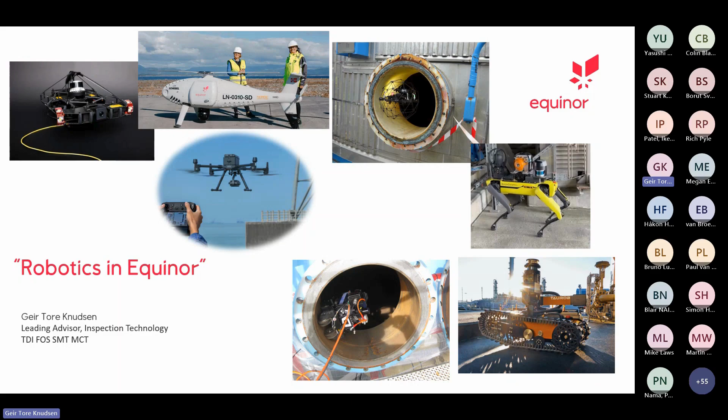Today, I will try to give you some insight on where we use robotic technology in our value chain, and maybe also touch into requirements and a little bit on technology development as well. But please note that the examples I'm showing on the slides do not represent all technologies we've been looking into, just some of them, to give you a picture.

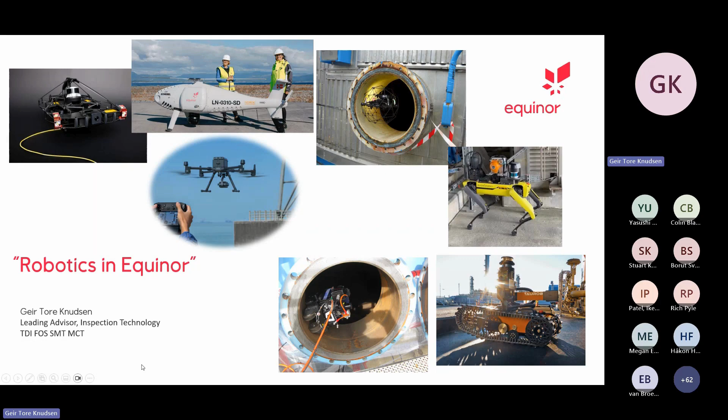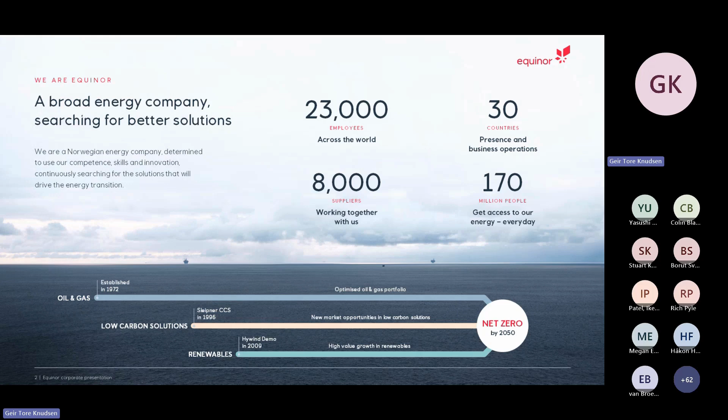First, a couple of slides to show you who we are as a company and what business we're in. We are a broad energy company, as many of you know, over 23,000 employees across the world, present in over 30 countries and over 8,000 suppliers we use. And I guess many of the suppliers are present here today.

A bit on our strategies, which is always safe, high value, and low carbon. So now let's see how robotic technology fits into those values and strategies.

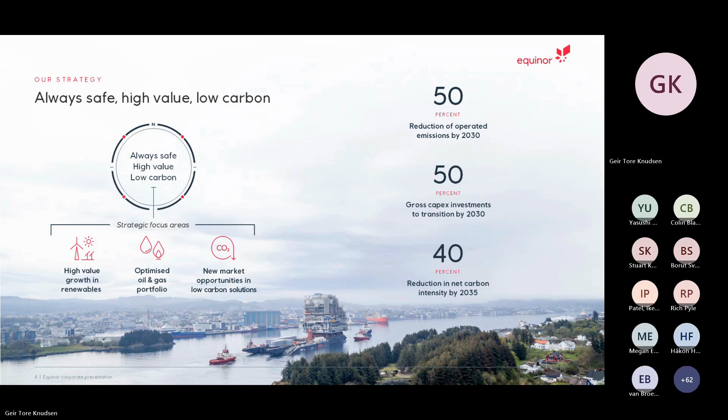Why do we use robotic and drone technology in Equinor? For the strategy always safe, this is all about minimizing the HSE risk by using robotic technology when we perform operations subsea, topside, in confined spaces and at heights, because we don't want human beings to be in those areas if they don't need to. If a robotic solution can do it, we want to use it.

And regards to high value, of course it gives us reduced cost if we plan it correctly, by excluding time-consuming and expensive support activities like scaffolding, blindings, and planning. And for me, working with inspection, the quality of the data is increasing by using robotics that can carry new sensors that give us more accurate data.

This sentence, I used to call it the Kinder Egg sentence, because it gives me a lot of things, like the Kinder Egg gives me. So it sums up the bullet points quite nicely.

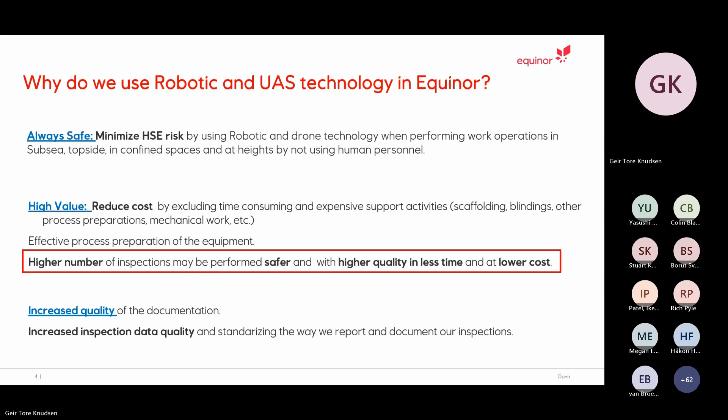We also follow the nine life-saving rules that many others do, and the confined space and working at heights rule fits right in with robotic and drone technology with regards to having a positive HSE impact.

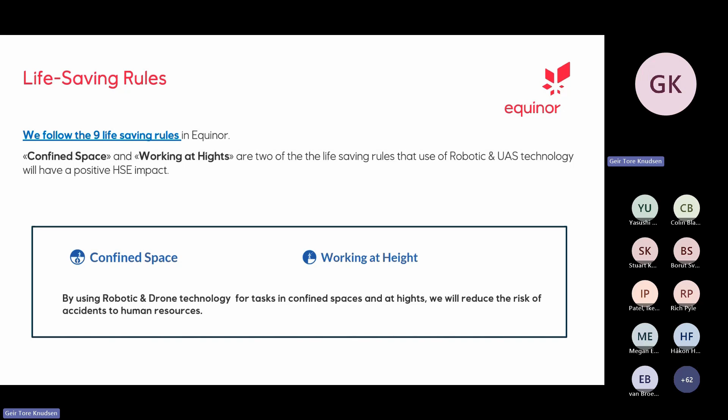When it comes to requirements, we now have requirements for working environment and inspection that involve use of robotics or automated systems, like it says here. It says that remotely controlled and automated systems shall be the preferred solution in the working environment requirements.

We say the same wording in inspection, but with inspection requirements we also say that we should use this technology if the data quality is equal or superior compared to traditional inspection solutions, because it's all about the data.

So if you compare it to how we did it before, we did it the old way because that's what we knew, we were happy with that, and sometimes a clever guy, forward-leaning on new technology, comes with a robotic solution or drone and says let's try this, and we do it. But now we try to flip it around, getting it into our processes, saying that we should first look at using automated systems, and then if that can't do the work, you can go do the traditional way.

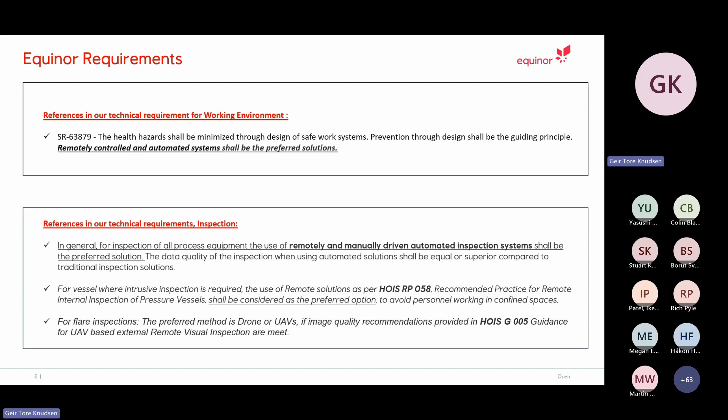Like you see on this slide, the RP58, the recommended practice for internal inspection of pressure vessels, and also the G005, use of drones for external visual inspection. So really good documents that we can refer to in our requirements.

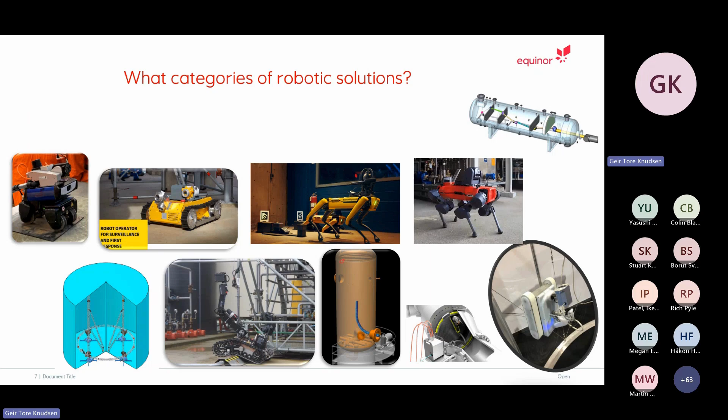What categories of robotic solutions do we have? I will quickly go through the areas where we use robotic technology, not the technology itself, but where we use it, starting from the deep subsea and all the way to the sky. Again, please note that this is not all the solutions we have been looking into, so the important thing is where we use it.

Okay, we're starting at the deep subsea. We have used ROVs for many years in the company and built up good experience in this field, and we have our own subsea division for these kinds of operations.

We use a lot of operators, contractors to do this for us, and we are increasing the use of ROVs. The goal is to reduce vessel operations offshore to a minimum by increasing the use of so-called residency ROVs that can live subsea for a longer period of time, like this example shows. So this is an important area for us.

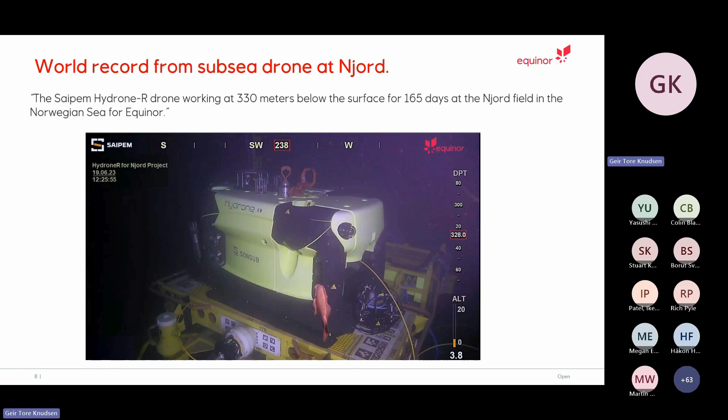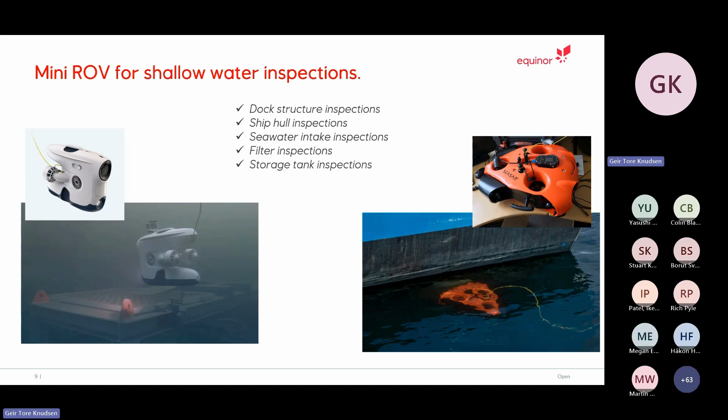Moving up from the deep subsea into shallow waters, we use mini ROVs for different kinds of inspections, like inspections of the seawater intake for land facilities, filter inspections, water tanks, ship hulls, and so on, like you see in the picture. So that's also an off-the-shelf, easy way to do inspections.

Still in the water, but moving up from the shallow waters to the splash zone, risers and other structure offshore. We use different kinds of solutions to perform inspection and maintenance operations in the splash zone area. This is being used more and more. Some of the solutions you can see here.

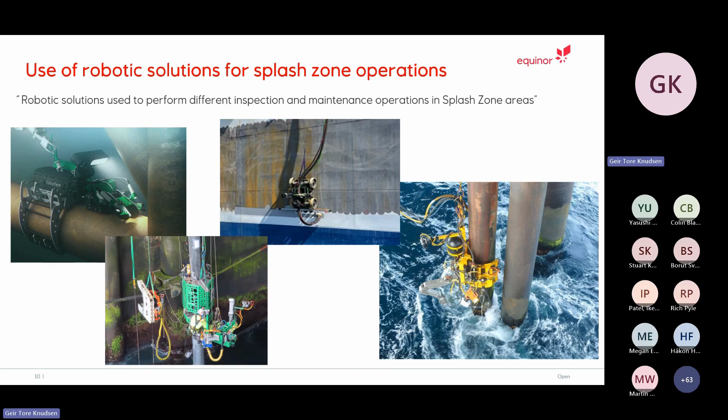Now let's move up from the water, topside, offshore and onshore assets. Here you see some belt-driven and leg robots, operator robots we can call them, that can also do inspection tasks for us. You see the list of tasks we are looking into, but not limited to that.

You have all heard about the 4Ds when robotics come into play here: dirty, dull, distant, and dangerous. And of course, these kinds of solutions can help us with many of those Ds, if you can call it that.

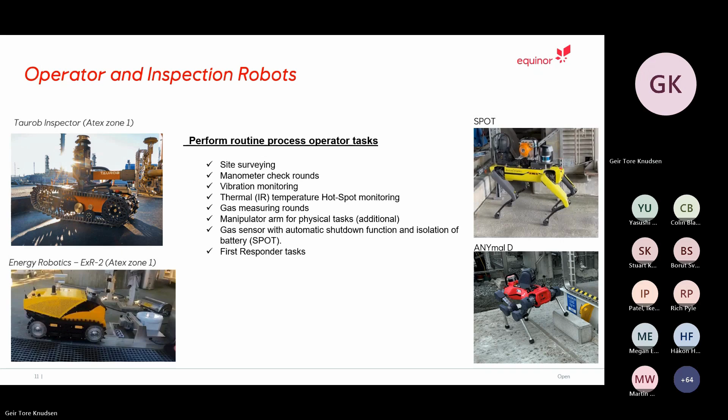We're also using robots for welding. Maybe some of you have heard about Weldar, an idea that came from one of our onshore plants in Norway, Tjeldbergodden. The concept is to perform weld repairs of corrosion damages on process equipment on site with the equipment still in service. So of course, that's a big value for us.

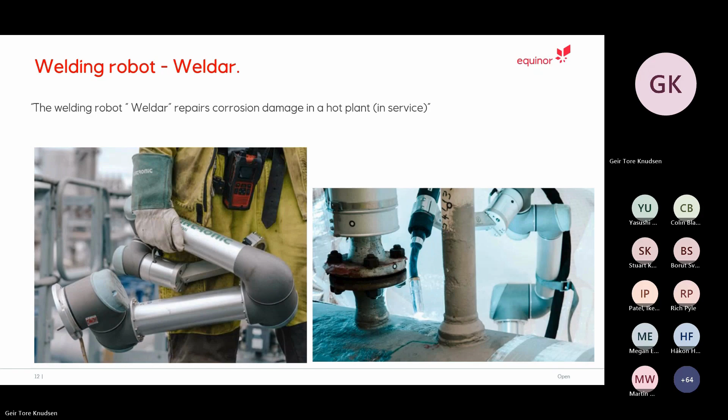And also, if we go into confined space, we have this solution, the Markus robot solution. It is a modular concept that you can tailor build to what you want, really. Initially it was designed for painting and sandblasting, but is now growing to be a solution for also other tools and operations, like you see on the picture to the left.

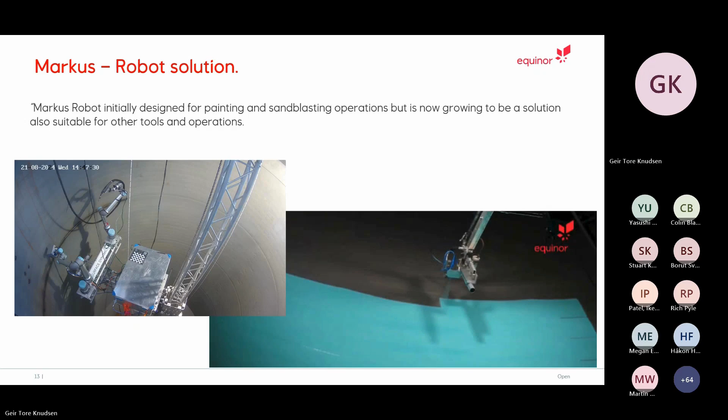Where we have welding, in fact it's a Weldar robot also mounted on the Markus robot. So here we are still in the confined space.

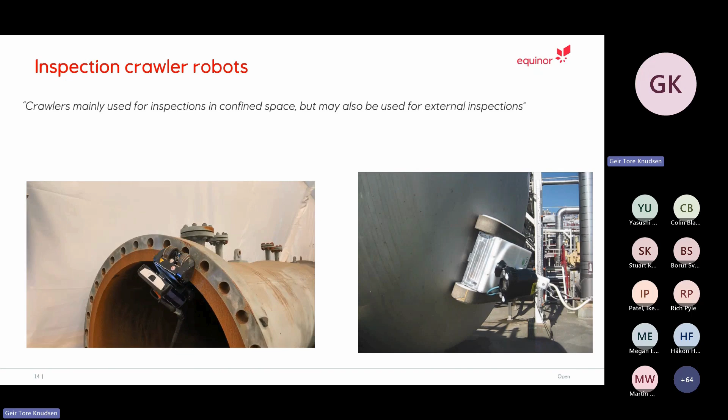And the crawler to the left, you can see, has magnetic wheels. I guess you have seen both of these solutions before. But of course, you can see that they get around and get the job done if you want to do visual inspection and some wall thickness measurements. So we use these types of robots when we can, in all kinds of equipment, if it's safe enough, of course.

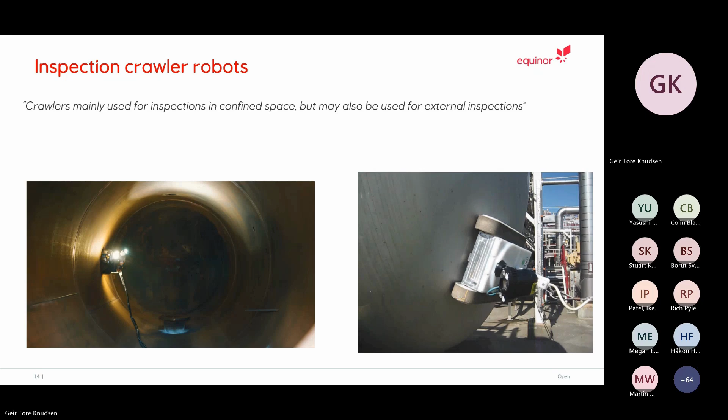So over to the drone, up to the air. In 2012, we did our first drone inspections, both onshore and offshore in Equinor. And most of our business areas are using drones today for different types of operations.

And we use drones for confined space and open air, and I will show you some examples in a bit. As you all know, the development of new tooling on drones goes really, really fast, and we do experience and expect increased use of drone technology in the future. No doubt about that.

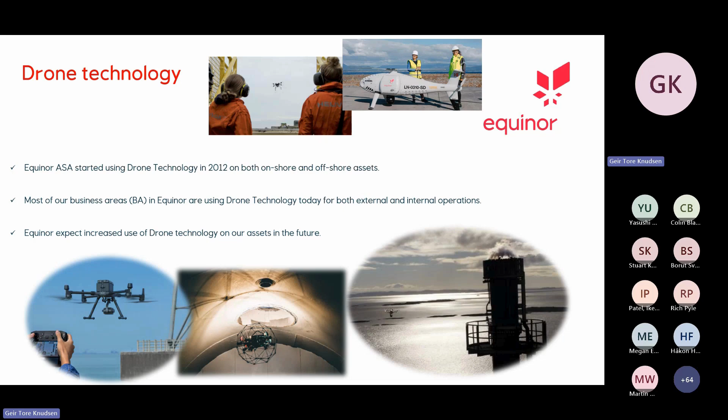Here is a good example of increased use of drones, or maybe another way of using drones we haven't done before, concerning use of drones for light cargo transport. We now have our own drone control center in Sandsli in Bergen to coordinate drone operations from land to offshore, and also between offshore assets. So it's getting big, and more operations are getting available for us.

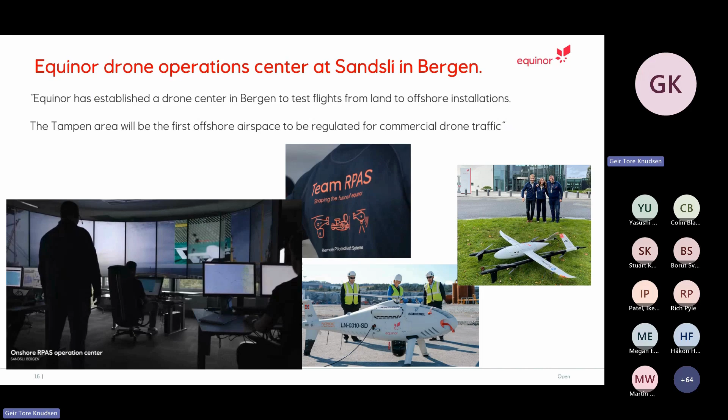A little bit on increased data quality that we talked about a few slides ago. This shows the quality that we can get by using crawlers. As you see on the 3D model, you can see one of the crawlers I showed hanging on the ceiling inside the vessel, looking into a nozzle. This is a pitch black environment, so it's really good pictures that we can get in these environments. As you can see, we can zoom in to this nozzle and even read what's written on the valve in the end of the nozzle.

So it's quite remarkable.

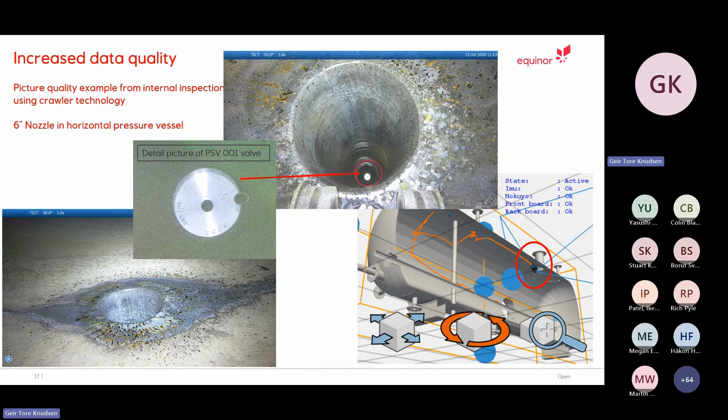Another example of camera optic development: these are the same vortex breakers we have taken pictures of. But the picture to the left is taken with a handheld camera through a nozzle or manway, I can't remember what it was. As you can see, it's quite a big difference between those pictures in quality and what you can get out of the pictures.

And if you see the picture to the right, you can see the date 2019 on the top left corner of that picture, and that's 5 years ago. If we think about the development of optics, I guess you can get better pictures than that today. But of course, these kinds of pictures give us the opportunity to take action with much better accuracy than before.

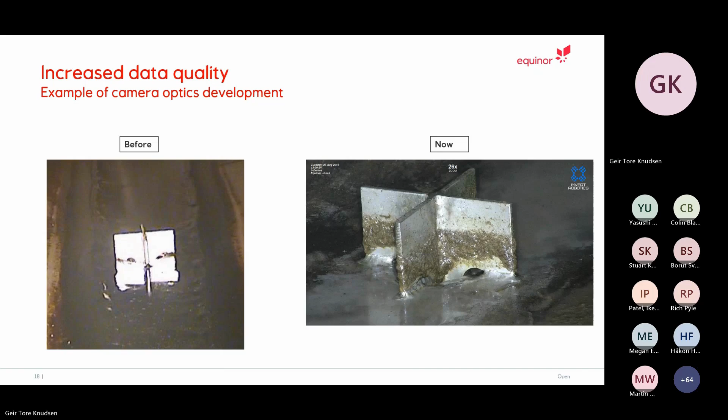This is an HSE example. You see the drawing, the size of that, and a normal sized man standing inside beside it. This vessel is 1 meter in diameter, and the nozzle, as you can see on the 3D model, is much longer than on the drawing. And this is a buried vessel, and you can think how challenging it is to make an evacuation plan for bringing a person out of this vessel if something happens to that man. So it's a no-brainer to do what we did here and drive down a crawler and do the visual inspection, and also we did UT point measuring on the shell.

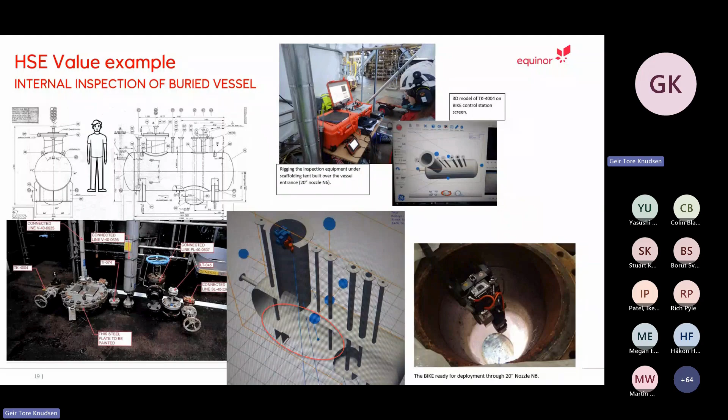Okay, over to the drone technology. As many of you know the terms UAS and RPAS, but for those who are not familiar: UAS is short for Unmanned Aircraft System, and RPAS is Remotely Piloted Aircraft System. Both these terms describe the whole drone system, including the aircraft, the control station, and the communication link between them. Keep in mind that RPAS specifically indicates human control of the drone, whereas UAS can also refer to autonomous systems. So it's a fun fact to take with you.

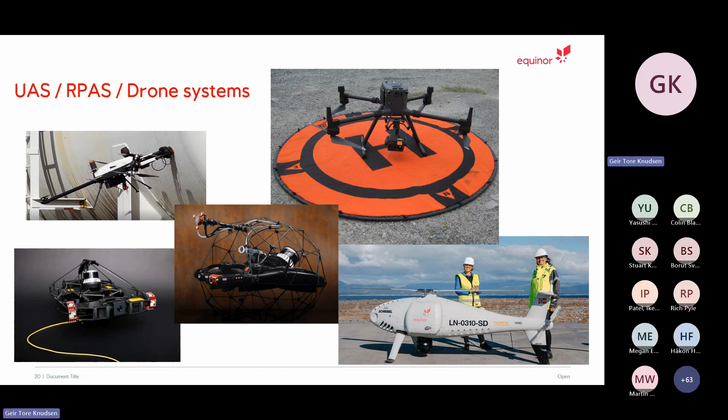There are other requirements that come into play when you're flying something in the air. We have our own requirement process for safe use of drones in the company. We have all the requirements for the governments and what we want in that process. And we're also working on an operation manual in Equinor to do low-risk operations ourselves and not be dependent on contractors to do the flying, but only for the low risk and low-hanging fruit operations, as we call them.

We also have a flight safety organization in Equinor that is responsible for everything moving in the air, including drones. So we rely on them when we have a new contractor, for example, that is going to fly for us - they are involved. And of course, we rely on the NCAA requirements that are part of the safe use of drones requirement process. So it's not just to start a drone and start to fly. It's a lot of requirements we have to follow and do everything by the book, which we do.

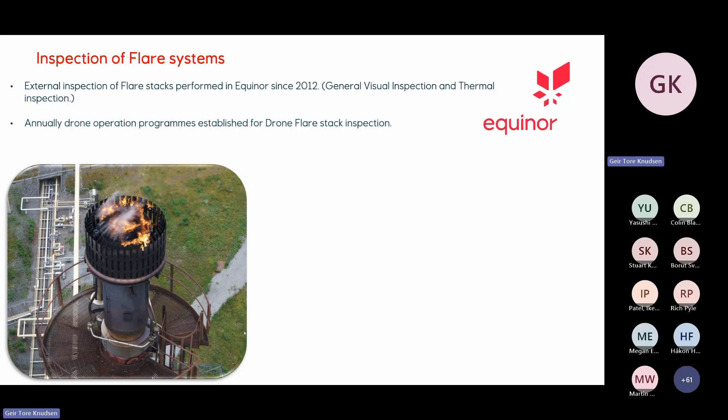And we use drones because we get these kinds of pictures. This is an old picture, and with the development in optics, we can even get better pictures than this. Here we have a standoff on the drone of about 30 meters, I think, because of the heat from the flare. So of course you have enough opportunity to get a good visual inspection and see deforming and cracks starting. It's a good way to use a drone.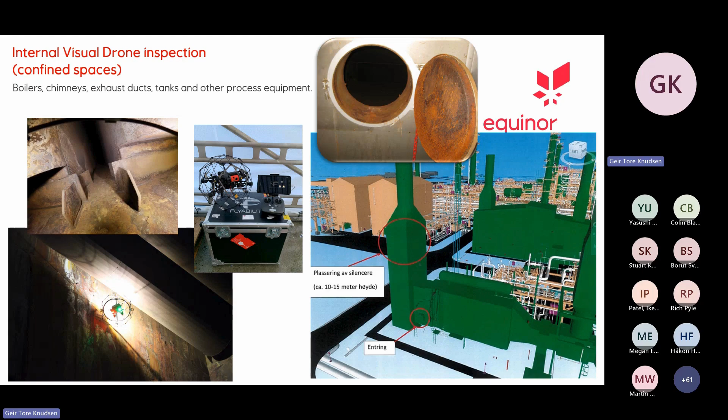And also we're looking into using NDT inspection with drones, and these and other solutions can help us with that. As I mentioned earlier, a lot of new tooling is coming to the drones, but we need to qualify it and see if it's good enough compared to doing it the traditional way. And that's what we're doing now, looking into it.

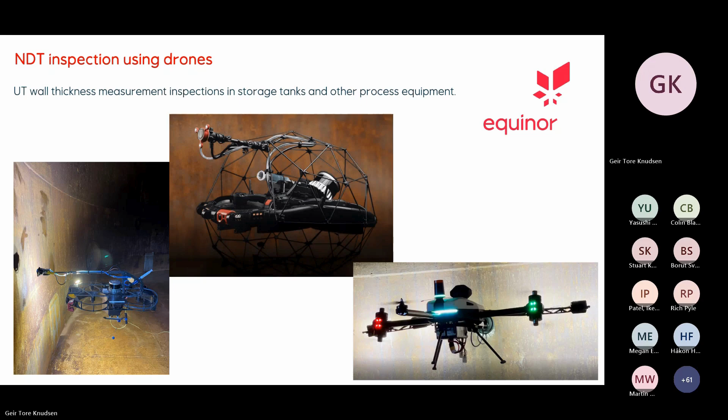Offshore asset inspections do more or less the same thing as onshore, but they also have below-deck inspections that can be challenging. They also do environmental inspections, and can use the drone for first responder tasks, emission measuring and so on. So we use drones a lot offshore as well.

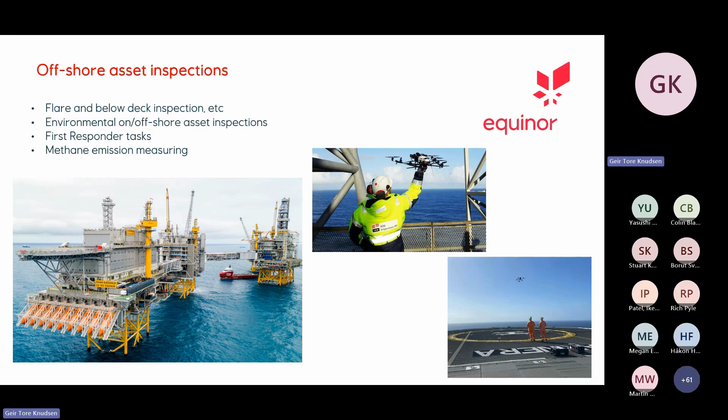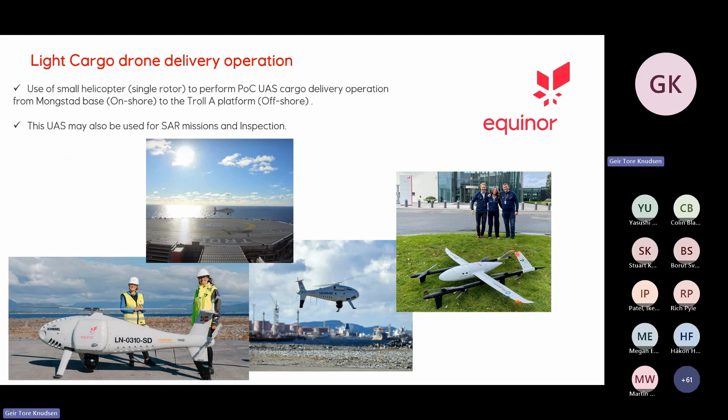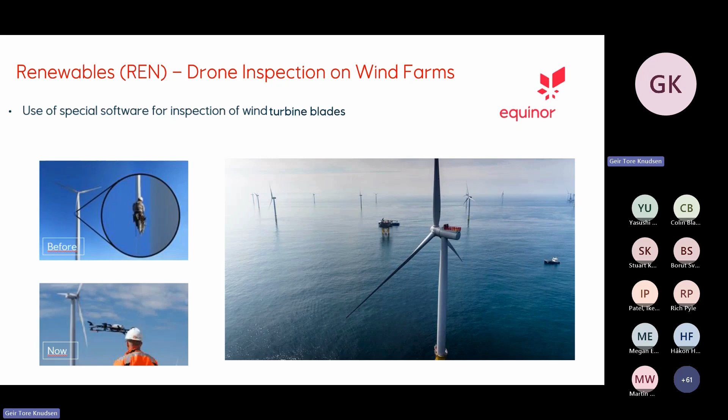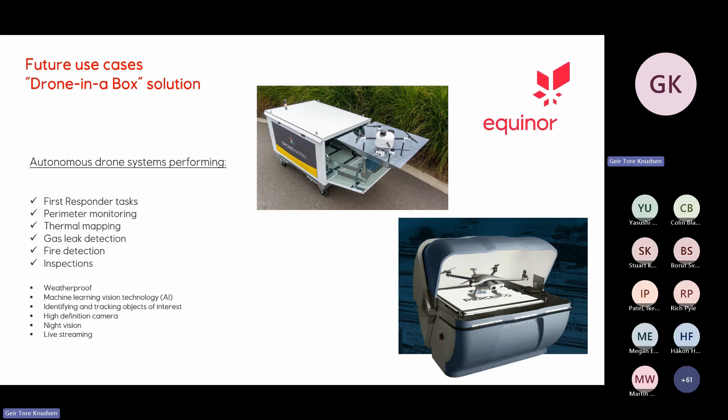But today, after years of maturing the technologies, the quality is getting much better, and we can show the value on POCs and planned jobs. We now experience embracement in the company in general for robotic solutions, where we use it where we can, after a thorough risk assessment—if it's safe enough, we use it.

So the way forward for us is, of course, to continue to be part of projects including robot technology that can give us safer operations, more efficient operations, and of course data is everything. So we get improved data—that's what we're after, so that we can take more precise actions when we need to, at an early stage.